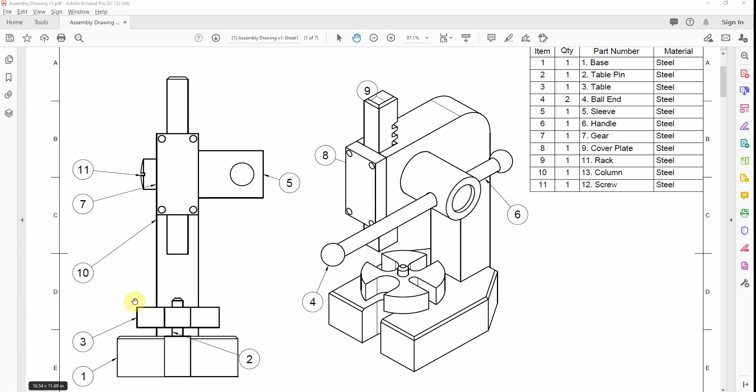So what we're going to do is make this view here. We're going to use all our components, so the screw, the rack which you see here, the cover plate, the handle, the ball end, the table, the pin. We're just going to do this front view, and then feel free to do maybe an exploded view like this if you so wish.

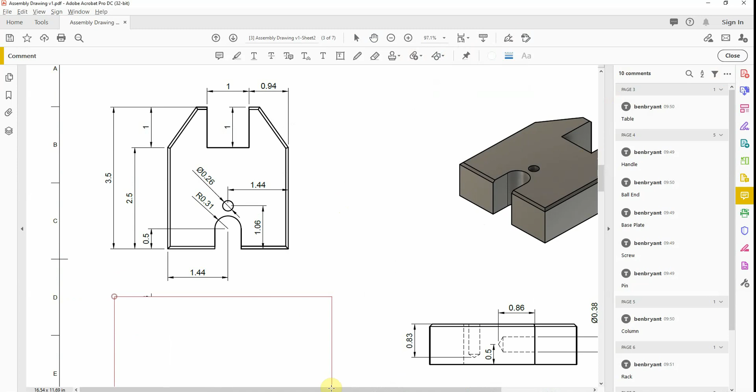So what I'm going to do is go back through my parts. I'm going to W block this base feature here. So what I'll do is we're going to come through and W block this one. Okay, and we're then going to move on to W blocking these features here.

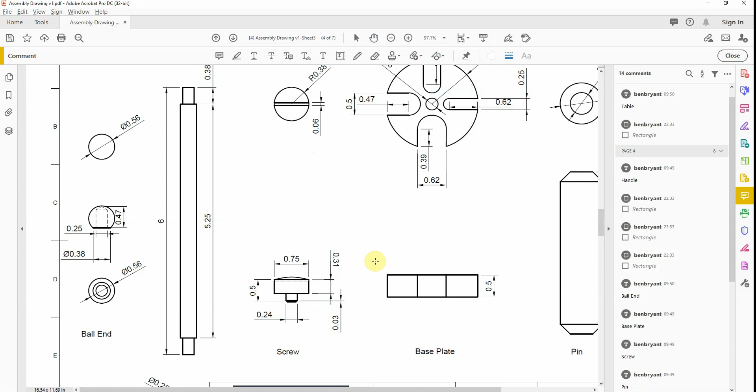So this feature, again, this one here. We're then going to look at the screw cap, which we're going to take as this one. We're then going to look at the base plate or the table, that one, and the last one is the pin, which generally looks quite massive, so maybe just a scale one, like so.

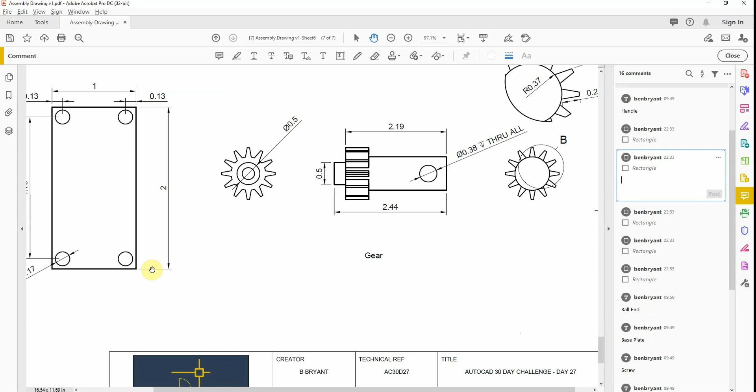And then our last page, we're taking our column, which we're going to take as this one, and our rack view, which is going to be that, but all these lines are going to be hidden, just move backwards. Plate, and this one of the gear.

So once you've W blocked all of those, what you can do is reference this kind of element of the drawing, this side here, and load into AutoCAD.

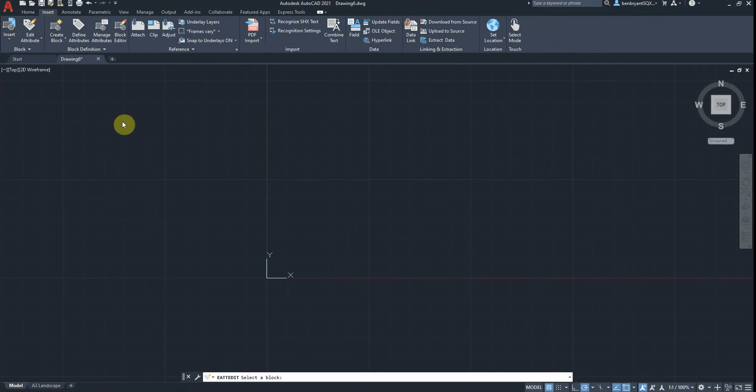Okay, so the first thing I'm going to do is insert my blocks. I'm going to insert the block header, which will pop up here. Blocks from libraries, which will then come into this section here. I'm going to resync because I've obviously already opened these before.

So the first thing I'm going to do is put my base in, which I'm just going to pop in here. So I'm going to do a move, specify the base point, move to 0,0.

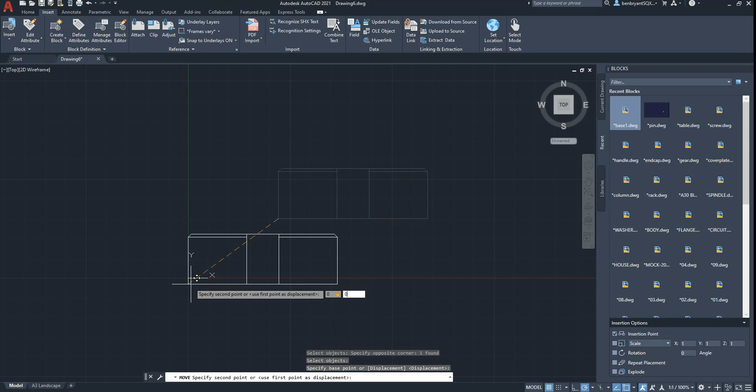Move so that it goes to 0,0. Okay, so it's strange, I'm going to move my workplace coordinates there, then that's going to be easier. It's not going to play ball. Okay, so that's the first part in place.

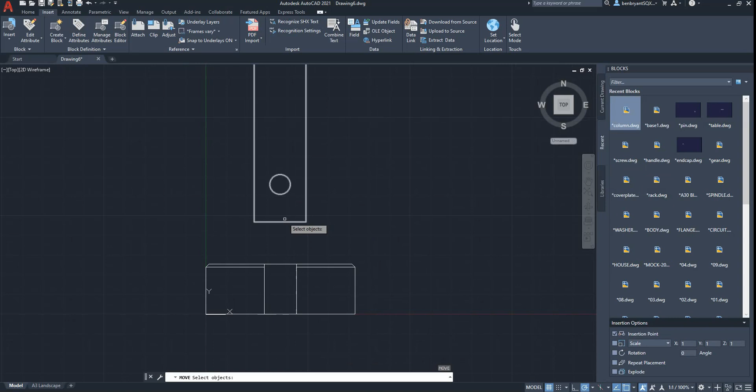The second part is we're going to need the column. Okay, so the column's going to pop in here. The column will sit midpoint, so when you select, you want to choose that feature and choose the midpoint of that line to the midpoint of this line. Okay, like so.

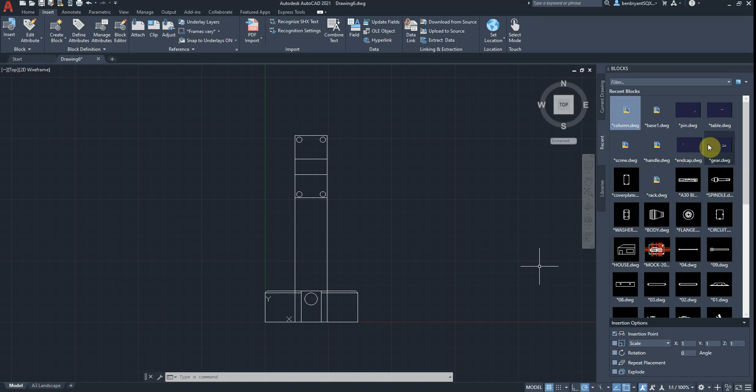Then we're going to bring in, so we've got the column, we could bring in the pin at this stage. Bring the pin in. Bring the table in as well.

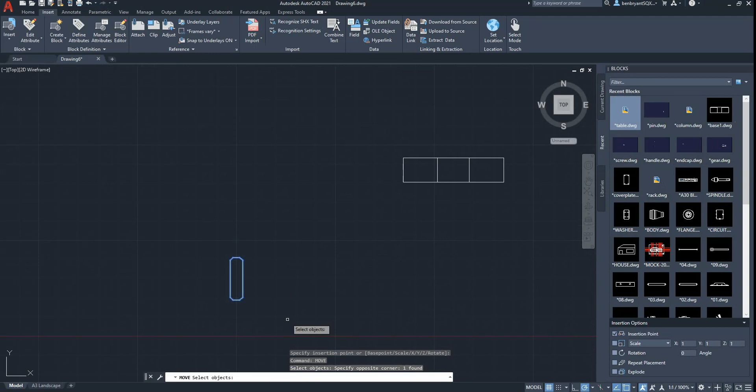So what we're going to do is move the pin to the table. So we're going to specify midpoint to midpoint, like so, and it will just kind of stick up ever so slightly.

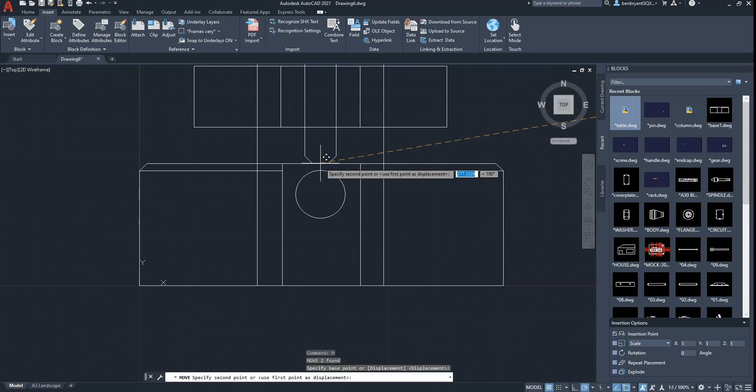I'm going to move that one then via a midpoint onto our column and our table. So our table will sit on the midpoint, like so. Probably going to be around about there-ish, like so. So that's that sort of element.

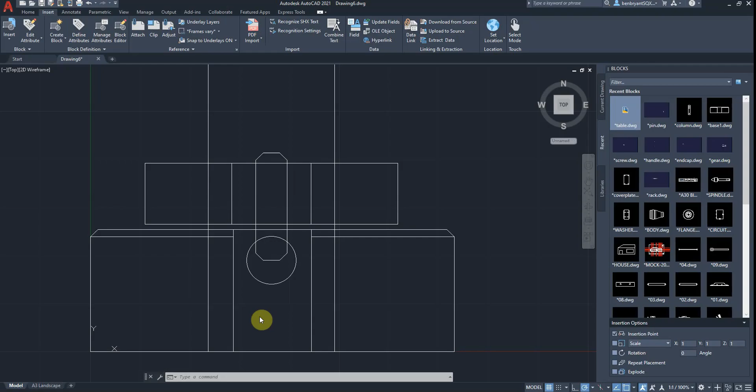Now you may want to start trimming and exploding really before you get too far into this, not like the last ones we did where you can sort of explode all at the end. So I'm going to come in and sort of trim out everything I don't need.

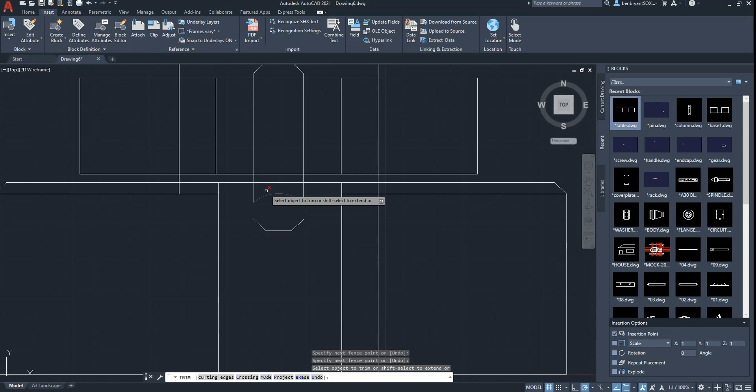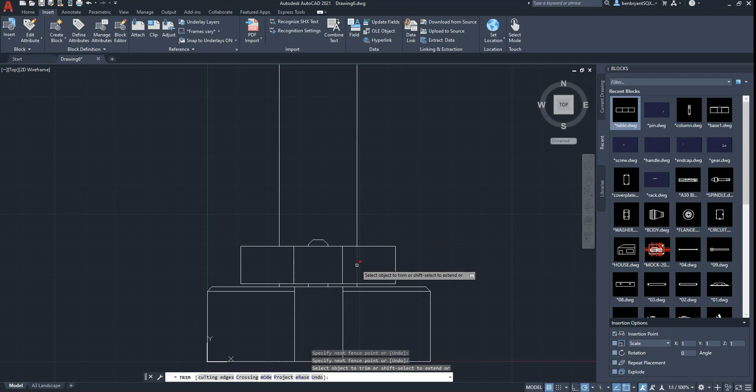So I'm not going to see that feature. I'm actually not going to see any of the circle, any of the pin. I'm not actually going to see, well, apart from the top part of the pin, any of that. I'm going to see this. I won't see the column apart from the back feature after the chamfer there. See that part, let's see a column through that part. Like I say, that's sort of where we are at this stage.

So that's that in column. Next thing I'm going to do is possibly bring in the gear and the rack. So I'm going to bring the gear in like so, so that's sort of set midpoint.

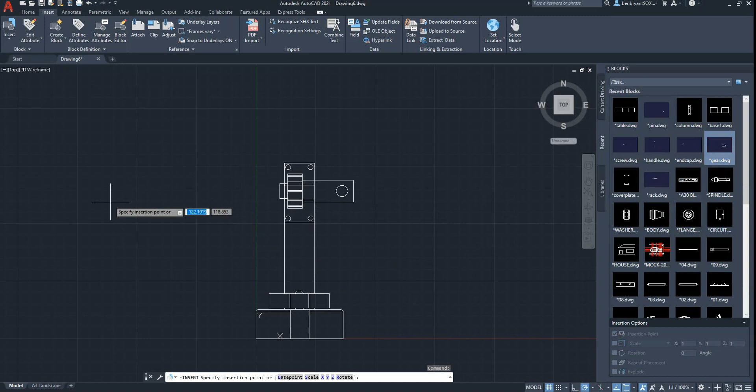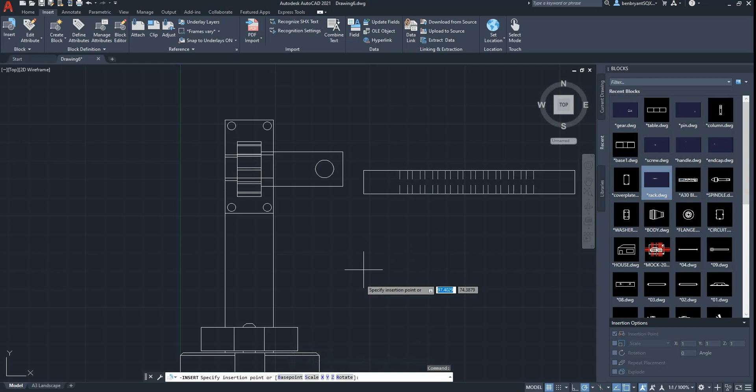So let's find that midpoint, match it up with that midpoint, like so. And now we're going to bring in, where's the rack? I can't see it, blind. Just bring a rack in there, we're going to rotate the rack.

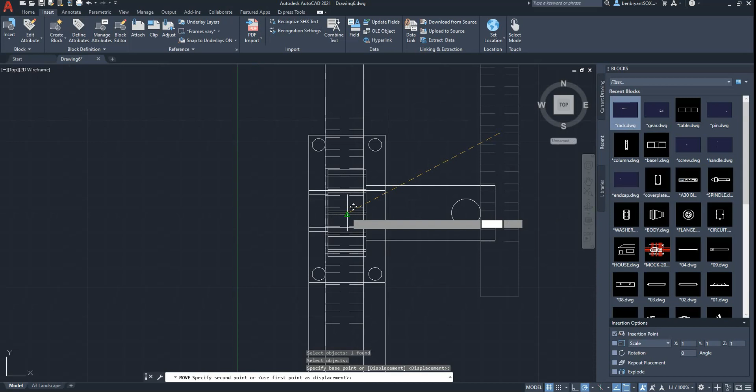Like so, we're going to move and align the rack. I've actually put these on as hidden so I can get to a point where I can line up on the pinion properly to midpoint, like so.

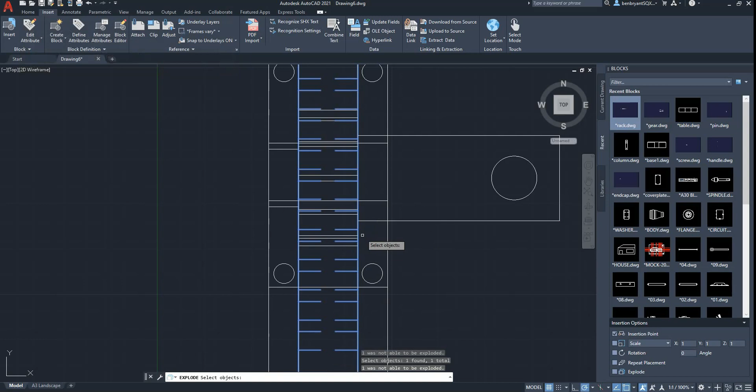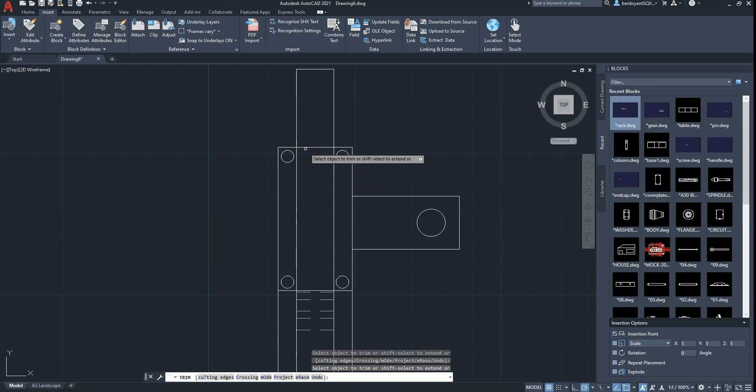What I could do now is explode these guys and trim out everything I'm not going to see, so I'm mostly not going to really see any of this. Not going to see any of that, not going to see any of this, nor that, nor any of that.

I'm probably not going to see any of those lines either. Actually, yeah, that's fine. I'm going to bring my cover plate and pin, cover plate.

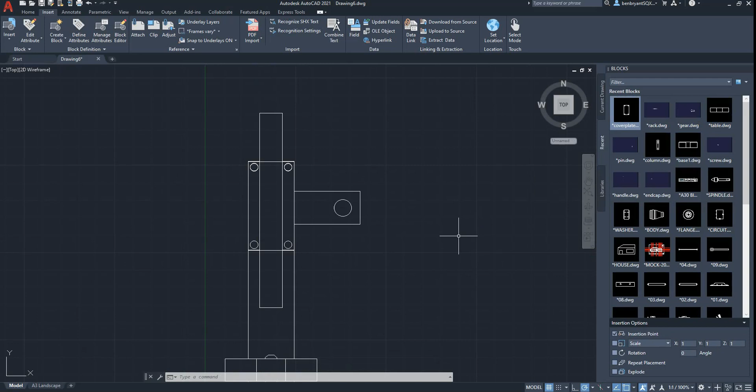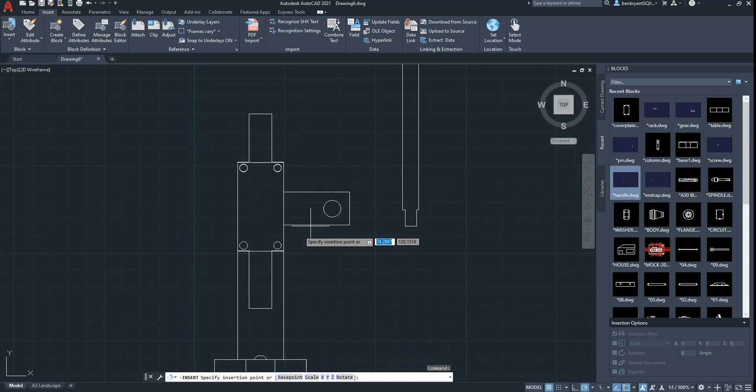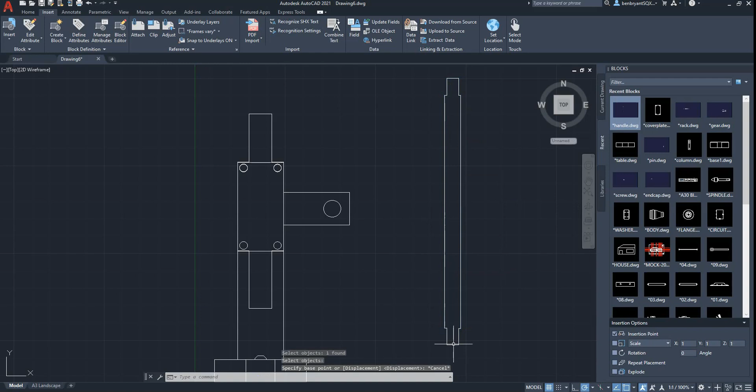Like so, I'm going to bring the handle in, move that again onto the midpoint. I don't even need to work out where the midpoint is, so I might center the circle.

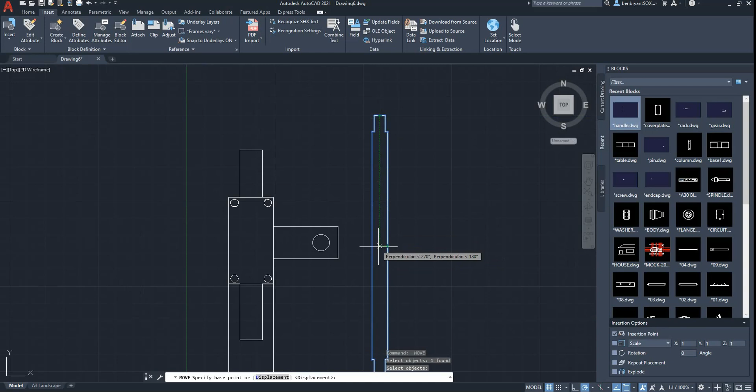So midpoint to midpoint, match centered circle, like so. Now, because that's going to go that way, we're going to say the circle's on the top. So again, we can trim out those guys. I'll explode first.

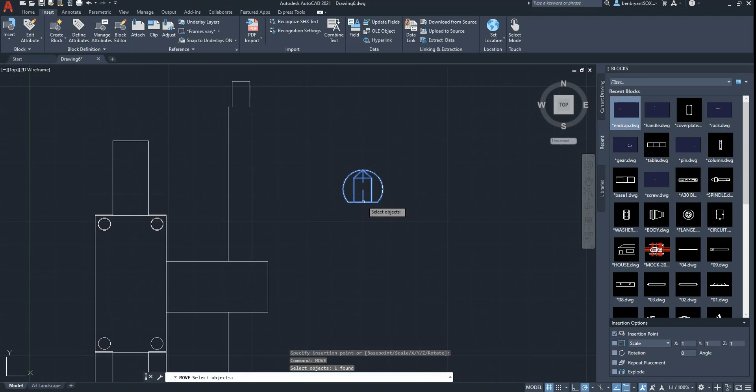Like so, and now we've got to put our little end caps on. So it can be that one by the centre, and rotate that one around an axis.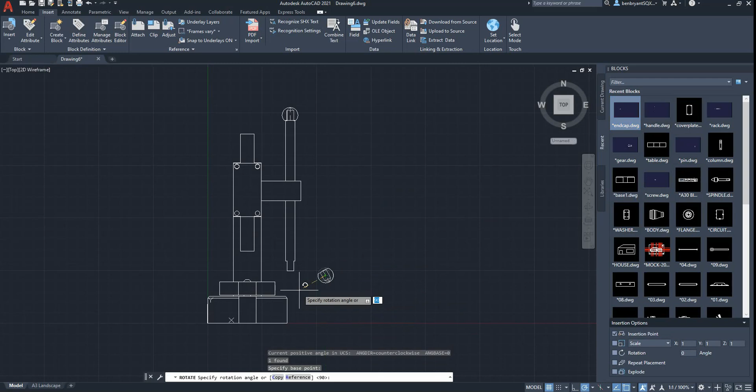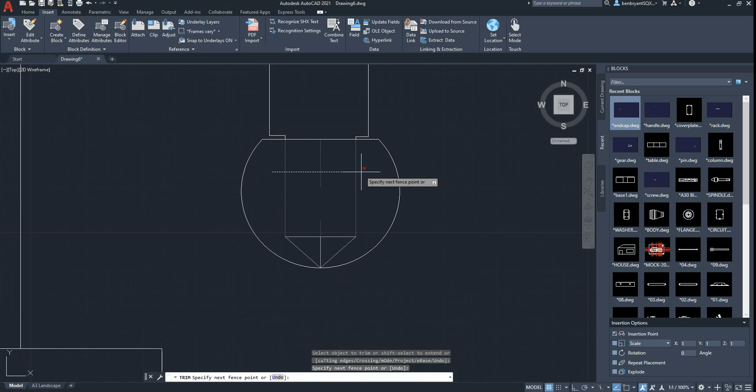Like so. Explode these guys. Essentially you won't now see anything inside. And there we have it, that's our front view.

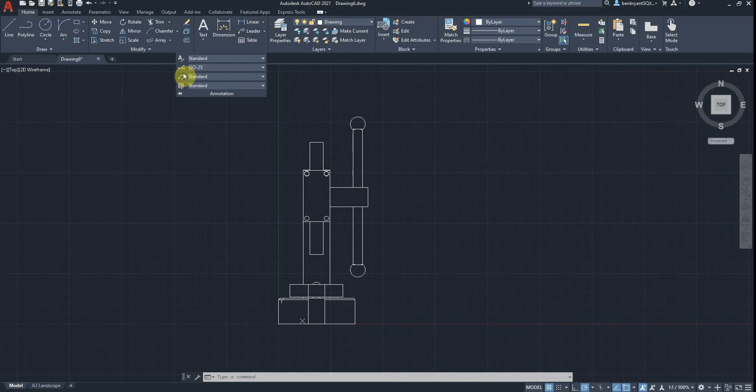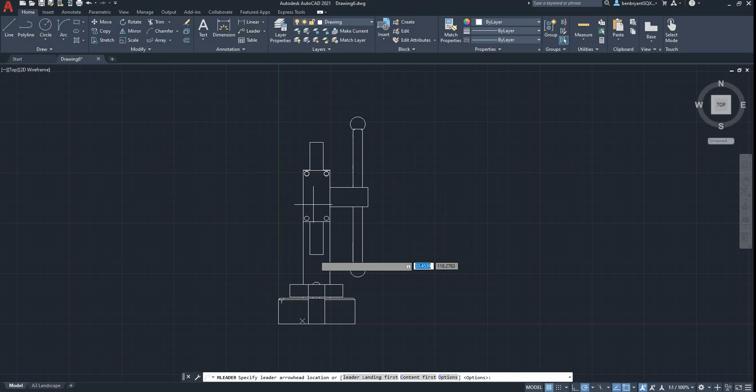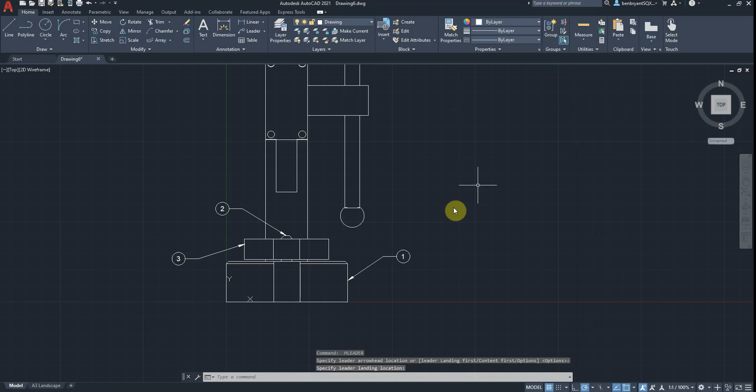And you might want to come on and say right, number 1. You've got number 2. Again, 3. I'm going to say the column is 4.

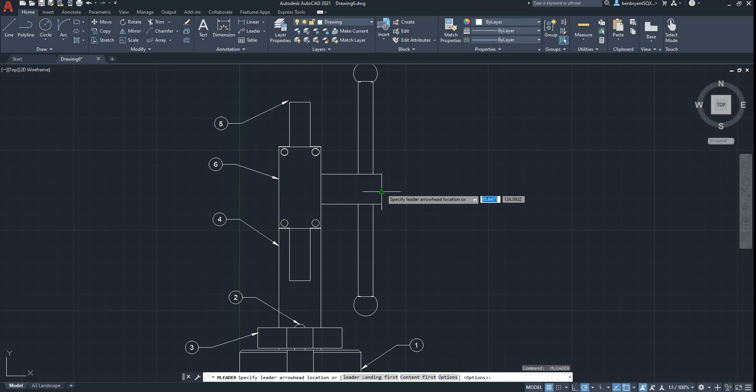This is obviously not matching the numbers I had earlier. I'm going to say the rack is 5. Let's do the cover plate, 6. Gear is 7. The handle is 8. And the end cap, that's 9.

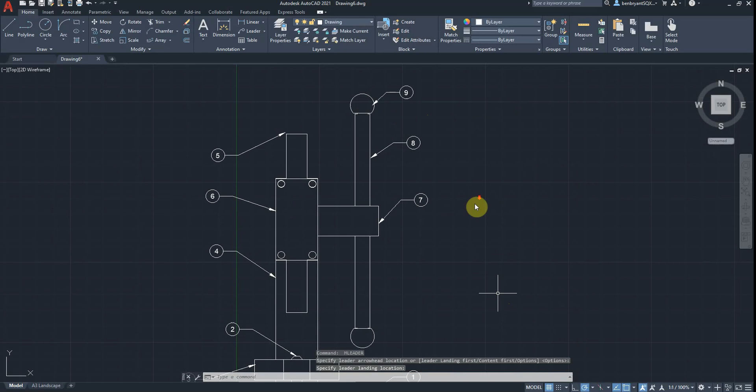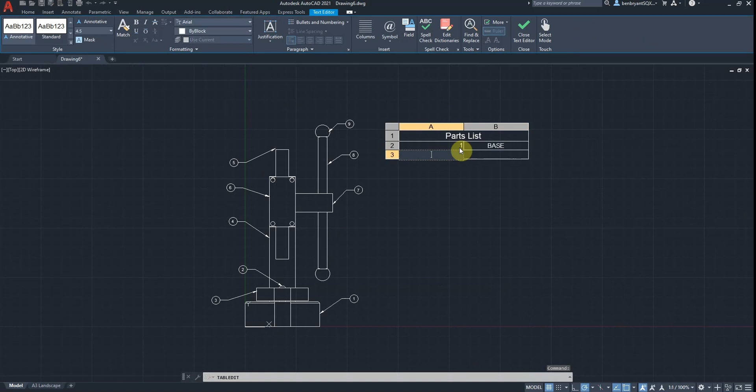And then what you guys can do is you can put a nice little table in. You could do this on your drawing as well, but you could put like a parts list. So you could run down: 1, which is base; 2, pin; 3, table; 4, column.

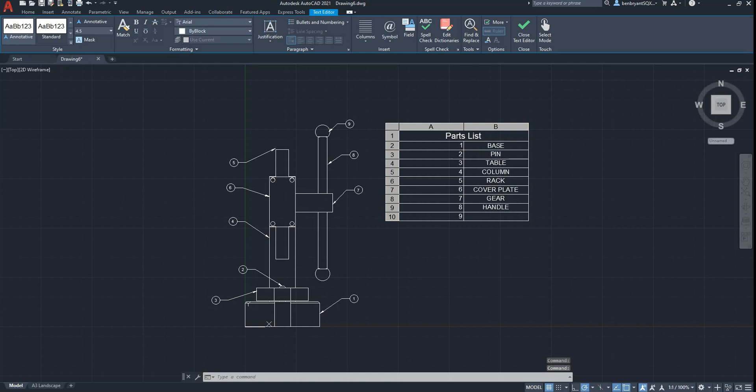5, rack. 6, cover plate. 7, gear. 8, handle. 9, end cap. And you could, if you want, also expand on your table.

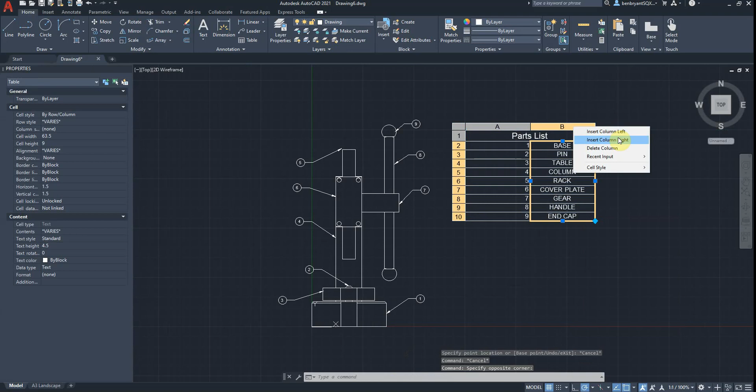You could actually put in like another column. Yeah, there's like another column. You can put in like quantity, so like QTY.

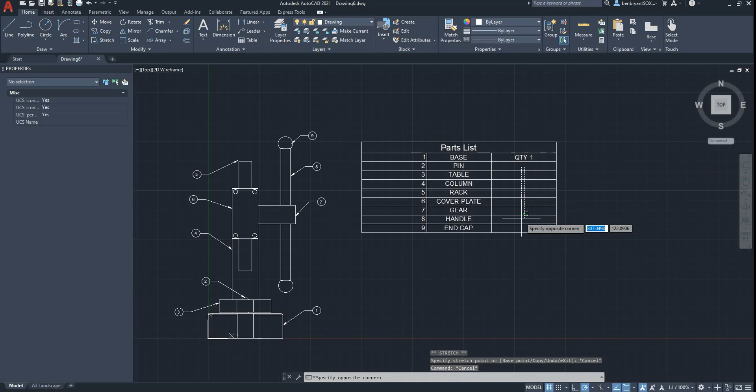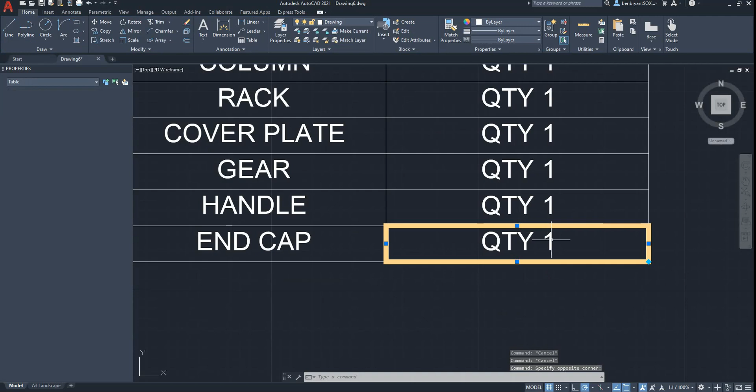1. They're all going to be QTY 1's apart from the last one, and that's when you've got quantity at 2, so you can change that. Quantity at 2, and you've got the nice little parts list as well.

So when you come to do your template, you can bring the whole lot down together, parts list and components, or you could, if you really wanted to, put the parts list on the inside like we did before, and scale your drawing accordingly. So that's it, that's our third assembled component.